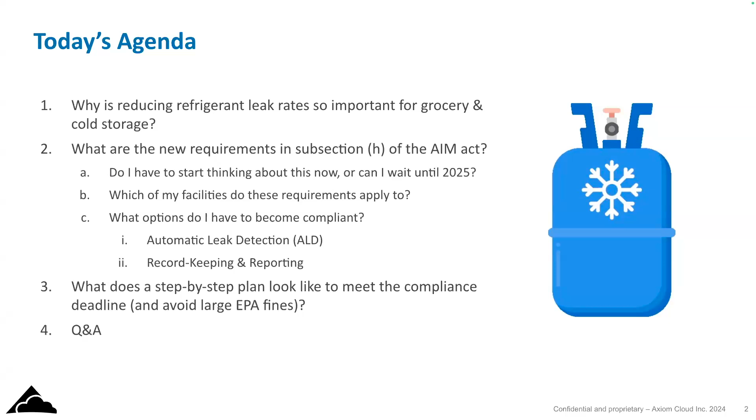Let's talk about the agenda. We're going to start by talking about why refrigerant leak rates are so important and reducing them, what the new requirements are in the AIM Act, and what a step-by-step plan looks like to meet the compliance deadline. We'll leave some time for Q&A at the end.

So why are HFC leak reductions so important for grocery and cold storage? There are 4 key reasons why refrigerant leaks are really detrimental to our business models in retail, grocery, and cold storage. There's the business continuity issue: when you have a refrigerant leak and it goes all the way to its logical conclusion, the system runs so low it can no longer meet temperature, and you have cooling outages. That's extremely disruptive for shoppers and employees, leading to lost sales, lost product, spoilage, and burnt out employees. Very painful.

There's the cost element, where a single leak can cost tens of thousands of dollars at this point, given just the price of gas, ignoring all the knock-on effects of labor, lost sales, et cetera.

There's a sustainability element, where in many cases refrigerant leaks are the number one driver of Scope 1 emissions, and one of the largest drivers of Scope 1 and 2 emissions combined. Each pound of gas that's lost is 2,000 to 5,000 times more potent than CO2. So you lose 1 to 3 pounds of this stuff, and that's equivalent to driving a car for a year. The average supermarket in the US, according to the EPA, is leaking around 800 pounds of this stuff per year. You multiply the potency by the leak rate, and that is a climate crisis all on its own.

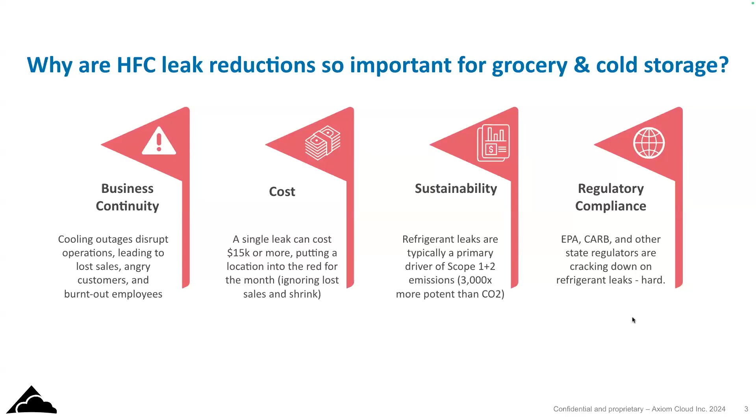All right, let's go to the next one here. Stephen, you want to talk about where we are today?

Sure. The grocery industry has been focusing on managing and reducing the leak rates of their refrigerant for a long time now, partially because it is very costly. Amrit was just describing some of the risks in terms of food spoilage and operational issues, not to mention the price of refrigerant has been going up massively by design, as part of the phase outs we're seeing under the Montreal Protocol, which has been around for decades, and the enacting legislation to better manage the production and consumption of these fluorinated gases.

We're really focusing on helping operators keep their commercial refrigeration beneath 20%, which is seen as the trigger rate for leak rates. When we look at the different ESG reports coming out of industry leaders, we can see that 50% or more of a store's Scope 1 and 2 emissions is due to refrigerant leaks.

Interestingly, retail giant Walmart put out their sustainability report, and Scope 1 emissions from fugitive emissions from refrigerant leakage were the majority of their Scope 1 emissions and made up over a quarter of their combined Scope 1 and 2 emissions. So if that's for Walmart, imagine what it is for someone who does...

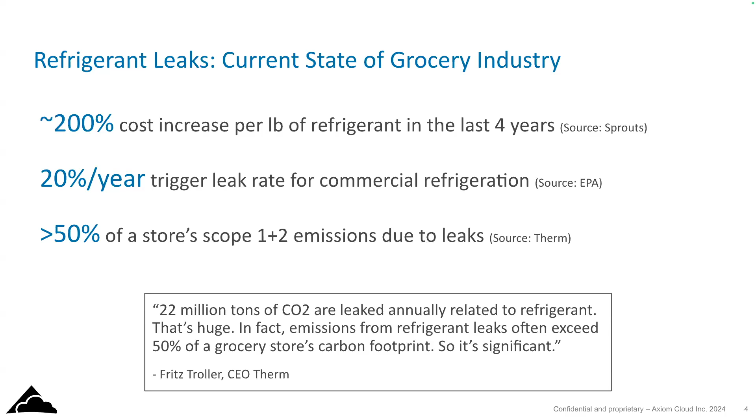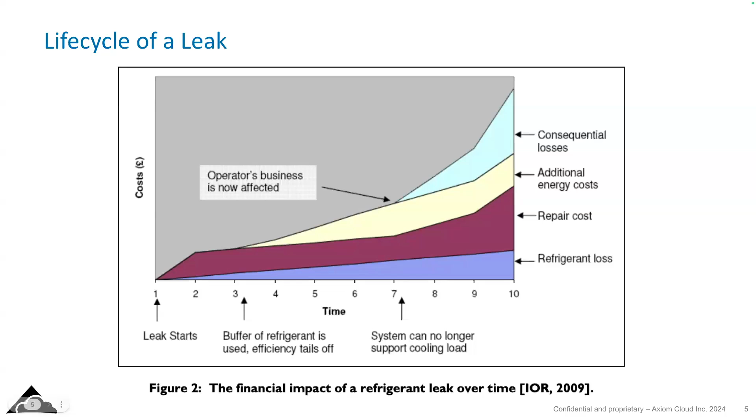So let's keep going. Stephen, you want to talk about the AIM Act? Sure. So the AIM Act is what we are all focusing on today. This was signed into law as bipartisan legislation by President Trump in December of 2020.

As we've discussed, the impact just in terms of tons of CO2 equivalent is massive here. It's a huge opportunity to make a meaningful and enduring impact on collective emissions and how we address the climate crisis. On this note, I'd say overall regulation of CFCs and HFCs has been part of a long, very promising track record of cooperation between multiple industry stakeholders and governing bodies at state, federal, and international levels. That, I think, can give us all a lot of hope that as an industry, we can come together, set achievable targets, and follow through with the technology and processes necessary to meet these objectives.

Now, in terms of the specific timing here, we've all read the draft framework of Section H, the management portion of the AIM Act. That was released about a year ago, in October of last year. So we are waiting with bated breath for the finalization, which we're expecting literally any day now. EPA has said by end of summer. I've heard that while the equinox is only a couple days away, perhaps the EPA defines end of summer by the end of September. So we'll see.

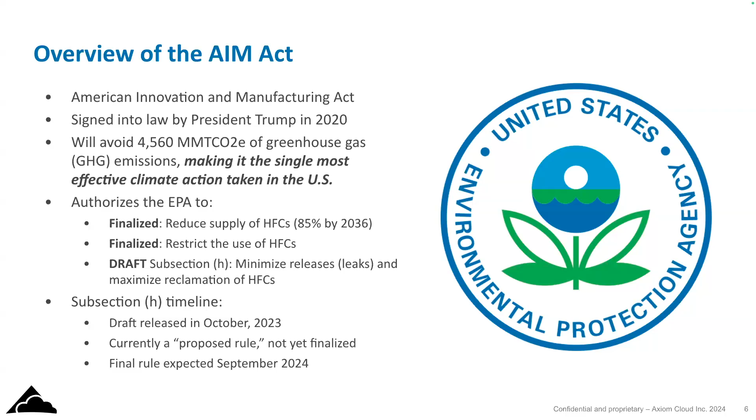Regardless, there are a number of things we can learn just from the proposed language that can help us better prepare. So I guess with that, why don't we turn to the next slide? Specifically, subsection H is the management plan.

And already we've seen the phase down rule, subsection E of the AIM Act, set the production and consumption controls. Essentially, the step down of the most harmful, from a GWP perspective, HFCs and refrigerants. Then the technology transitions rule applied specific restrictions to specific sectors and subsectors. And what subsection H does, which will be finalized any day now, is really focus on maximizing reclamation and minimizing release of the HFCs.

So as other portions of the AIM Act control the supply of these refrigerants, subsection H is really focused on how do we manage what's already in the field. How do we manage the existing fleet of assets, the existing refrigerant, so that we're making best use of everything that's out there and minimizing the potential for harmful releases.

One thing to note is that subsection H meaningfully broadens the scope of assets subject to these refrigerant management requirements. I'm sure everyone on this webinar is well aware of the decades of regulation already in place under Section 608 of the Clean Air Act, which have really focused on ozone-depleting substances and generally set the charge size at 50 pounds and above. Granted, there have been other restrictions on disposal for smaller assets, but for the most part, most refrigerant management at both the federal and state levels has focused on assets at 50-pound charge size and above.

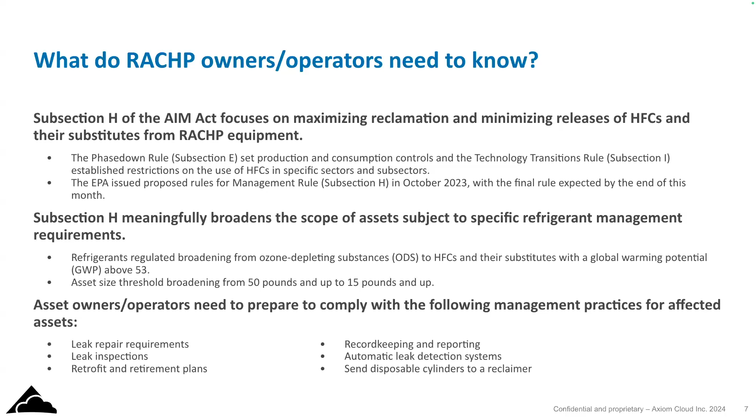So now we know more about actual subsection H and what it includes, and there are some really significant changes. And I didn't mean to send that note out during Stephen's slide—apologies for that, I pressed send a little too early there. But basically, the next question is, do I need to start thinking about this now, or can I wait?

So we put together a little calculator just to give folks a sense of what the timeline is here, and let me think about the scope of what needs to happen from the perspective of my organization. I dropped that link into the chat. But basically, if you're doing some simple back of the envelope math, you're looking at the total number of sites in your portfolio today, the percentage of those sites that require automatic leak detection and other things under the AIM Act, and then you think about how long it's going to take to contract with a new vendor, including things like legal, IT interconnection, procurement, et cetera.

There's not a lot of time here because ultimately this regulation is coming out supposedly this calendar month, September, and the EPA has signaled there's going to be a 12-month compliance period. So that means that by the end of next September 2025, this needs to be deployed across all eligible facilities. That's not a lot of time. So we want to give folks a sense that it's time to start thinking about this, planning for it, considering options now.

Stephen, do you want to talk a little bit about the percentage of sites where this is going to be applicable?

Yeah, so what we've seen—there are many different aspects to the AIM Act, but the specific leak repair, leak inspection, and reporting requirements kick in at certain leak rate thresholds. And what we've seen, generally speaking, is about 25% of assets in our massive data set of hundreds of thousands of assets report leak rates that exceed that threshold. We actually assume industry averages are probably higher, because customers already using a refrigerant management platform are using more sophisticated management practices than the vast majority of assets out in the field. So owners and operators of those systems need to be prepared to broaden those standard operating procedures to include all assets, inclusive of smaller assets, and other material types that may very well be subject to these requirements.

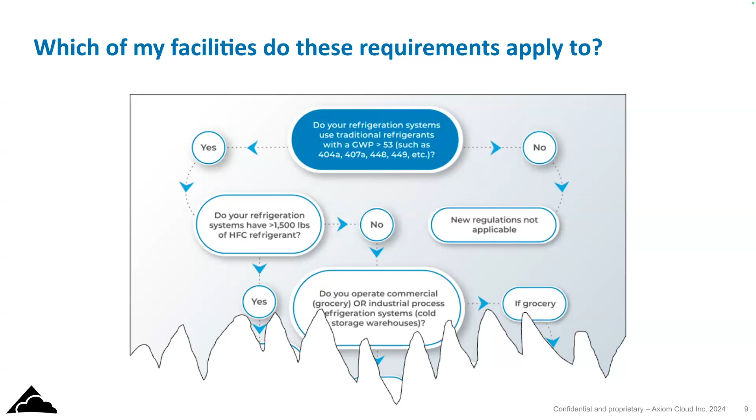Of course, Stephen and I would be happy to help with that too, if there are questions. Let's go to the next slide here.

So let's talk about leak detection methods that are commonly used. We're going to zero in on leak detection, specifically automatic leak detection, for a second. Then we're going to turn over to refrigerant management, tracking, and record keeping, and Stephen will talk more about that.

In terms of leak detection methods commonly used today, the most common method we see in industry is case temperature alarms. Put simply, there's no leak detection involved - grocery stores are waiting until there's a critical temperature emergency in the facility, and then they determine after the fact that there's been a leak, in many cases for a very long period of time. Now they're at a critical end state where the facility has run out of gas and is having issues providing cooling services. We're having case temperature issues. It's just not a great state of being.

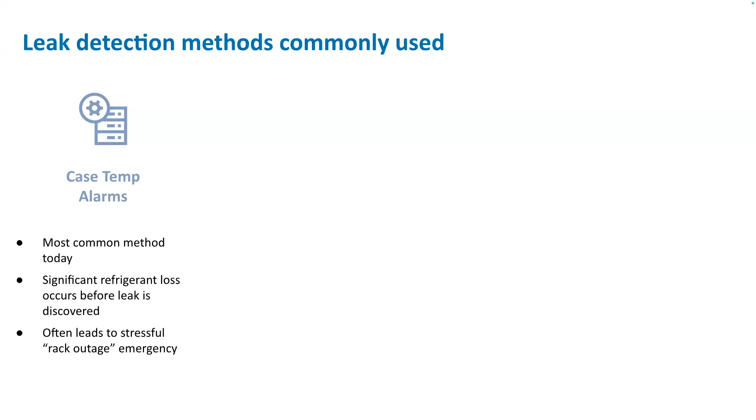Quarterly manual leak checks technically meet compliance requirements in some cases, but not others today in California. They will meet certain EPA level requirements under the AIM Act as well, but definitely not all of them. There are significant drawbacks from an ROI standpoint and from a leak rate standpoint - if you're only checking every 90 days, you might miss a leak for 89 days if it pops up right after one of these checks.

Beyond that, this means in many cases you're very much dependent on whether the technician showing up to do the manual leak check is really putting in their best effort, and whether they're being really careful to check every last potential leaking area. Or maybe they're tired, or they have 15 other service calls that are high priority emergencies taking more of their headspace and time and energy that day.

There's the single point gas detectors - essentially a little box you bolt onto the wall in the mechanical room typically. These provide a really important safety function because if you have so much refrigerant leaking into the air that it displaces oxygen, that can cause human occupants to pass out. That's really bad, so this helps comply with a lot of safety regulations.

Unfortunately, these single point gas detectors are not a good solution for overall reductions of leak rates because they're only catching really huge leaks, and only in enclosed spaces like the mechanical room. So you're going to miss the majority of leaks using that strategy. However, this has been found to be essentially a loophole in a lot of existing regulations at the state level - if you have one of these single point gas detectors in California, for example, you're technically compliant with a lot of these regulations.

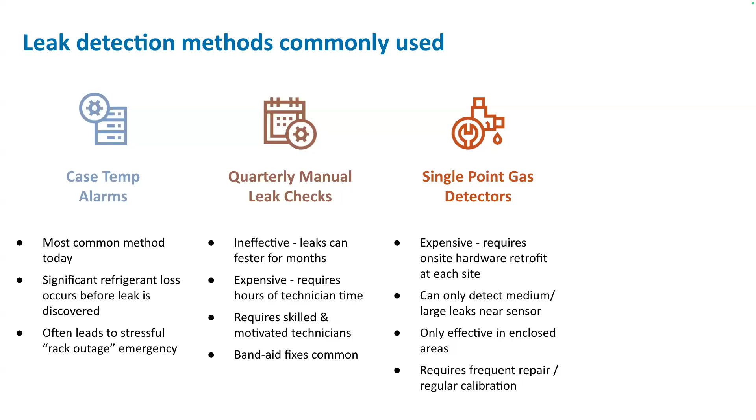And finally, there's receiver level sensor threshold alarms. These can be really effective. The problem is that if you don't already have them pre-built in from the factory, retrofitting is an absolute nightmare, and that immediately disqualifies over half of facilities out there in the field today, based on our experience. Even if you do have these sensors in place, the data coming off of them is incredibly noisy and difficult to interpret.

So when you have a condenser split turning on or off, when you have a domestic hot water heat reclaim turning on or off, when you have different case groups coming in and out of hot gas defrost, it causes huge swings in refrigerant levels within the receiver.

And so this data becomes really noisy. You can set up all kinds of rules and alarms, and you end up getting so many false positives that a lot of times they're ignored because it's too much to manage for a team that has other priorities. So this is another example of a solution that's been tried a lot, but really hasn't delivered the type of benefits that the EPA is seeking, and that we as an industry should be seeking as well.

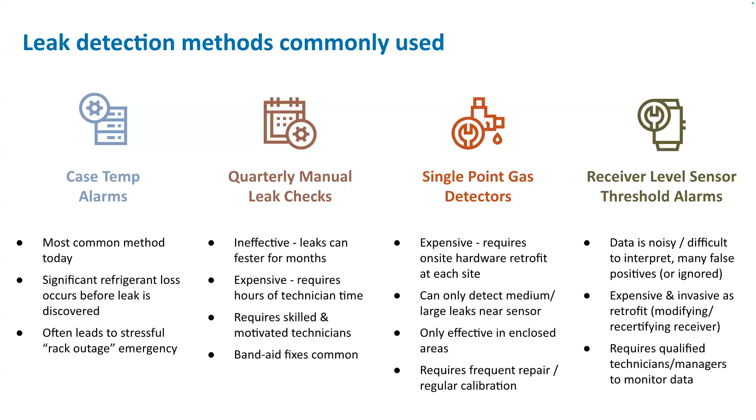So what are the compliant methods available today? They fall into two buckets according to the EPA. The first is called direct ALD systems, direct automatic leak detection. The EPA defines that as using sensors or hardware to monitor the concentration of refrigerants in the air.

So this is essentially a sniffer system. It's sniffing the air, determining how many parts per million of refrigerant are in the air today. The EPA listed 8 direct ALD manufacturers in the AIM Act, Subsection H, released back in October 2023.

The EPA is very clear that having a single point solution in the machine room doesn't cut it. You need a lot more sensors than that throughout the facility. So in many cases, folks are going to be resorting to multi-channel leak detectors, where you have 16 to 32 to 64 channels of little capillary tubes that are retrofitted, installed, and routed throughout the facility, then feed back into a couple of centralized sensors, sniffing each channel individually on a cyclical basis.

So there's a lot of advantages to these type of systems. This is the fastest type of leak detection. You can detect a leak in minutes after it begins. You can pinpoint the leak location to wherever that sensor is, and it does provide that safety compliance as well, providing an immediate alarm in case there is a real human safety issue.

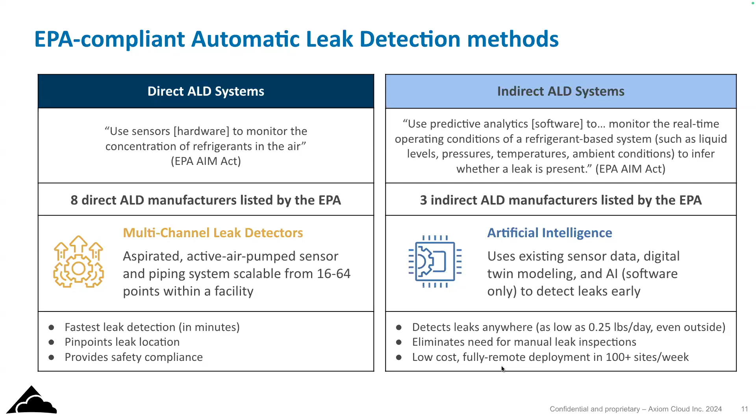So a lot of advantages to both. And obviously, there are a lot of decisions to be made there by each individual grocery chain. So I'm going to hand it over to Stephen now to talk more about compliant refrigerant management plans. Essentially there are 3 broad categories that everyone needs to be thinking about in now a broader sense.

First is understanding your exposure, then it's updating your standard operating procedures, and then finally it's ensuring that you're doing all of this in an audit-ready way.

In terms of your exposure, determine which assets are included in the Subsection H requirements. Unfortunately, we don't have the final rules yet. Any day now, we should know what the charge size will be. Are they going to go with 15 pounds as proposed? Are they going to increase that maybe to 25 pounds? Are they going to decrease that maybe to 5 pounds?

Not certain yet, but you probably want to have a good sense of what your current asset profile looks like so that you're prepared. Additionally, material types—they have now broadened the material types that fall under these requirements from just ozone depleting substances class 1 and class 2, to now incorporating HFCs with GWP of 53 or more. So making sure you understand the charge sizes and material types in your fleets helps you better prepare to accurately track and address these regulations when they go into effect.

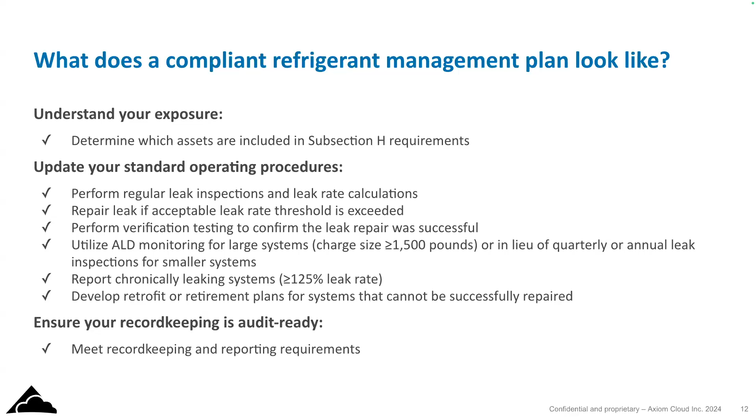So, Stephen, you want to start us off on this one? At the risk of being repetitive here, the main thing you should do now is understand your exposure. Make sure you have a good sense of your asset inventory, specifically a focus on material type and charge size—that's the first step. Many of you already have this. Great—now you can make informed decisions around how much your practices will have to expand to meet the broadening surface area of these regulations as enacted by Subsection H.

But if you're not sure, if you've just been tracking your larger systems, then you're definitely going to want to make sure that in your upcoming service visits or general procedures with your facility managers at the local level, you're enacting some sort of plan to have a better understanding of your asset inventory so you're ready to update as necessary.

Yeah, on the second piece here, this is a critical one. I can say with great conviction now that doing nothing is no longer an option. So have that conversation with your leadership, with your CFO, with whoever you need to have that conversation with, because you're going to have to do something in 2025.

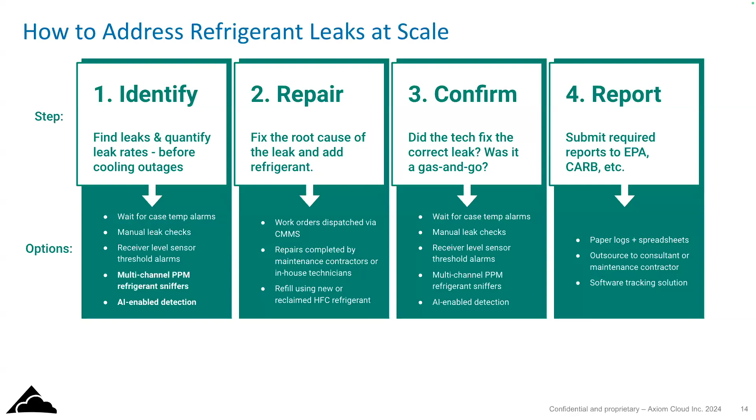And finally, reporting. This is getting back to record keeping, being audit ready, and ultimately proactively reporting when required to EPA, to CARB, and to other state and federal agencies as required.

So looking at the AIM Act, there's a bunch of new requirements across various parts of this overall process. Now on the identification piece, automatic leak detection is required. On the repair side, as we chatted about briefly, prompt leak repairs are now required, and use of these reclaimed HFC refrigerants is now required according to the draft language. A lot of this stuff was required in the past, but the AIM Act is substantially tightening up these requirements. Finally, on the reporting, record keeping, and logging side, requirements have increased substantially, especially for these chronically leaking appliances.

So to summarize, the AIM Act is not changing this 4-step process. It's simply making these various steps more rigorous and providing a little bit more federal oversight. Key takeaway here is that there's not a single vendor which can help with all 4 of these. It's going to be a tapestry, a team, essentially, to help you accomplish your goals as a retailer, to remain compliant, and also to achieve these other ROI, speed, and ease related goals that you may or may not have.

So we've done fantastically well on time here. And I guess, Stephen, last question: which steps in this process does Trakref support today? Yeah, well, I'd say Trakref helps you remain audit ready for every piece of this 4-step process.

So from an identification standpoint, you want to make sure that whether you're using regular leak inspections or ALDs, that you have a record of both the method that you're using, the fact that it's up to date and calibrated, and that those service events, whether it's an alarm that is triggered or an inspection that takes place, is reported in a way that is audit ready.

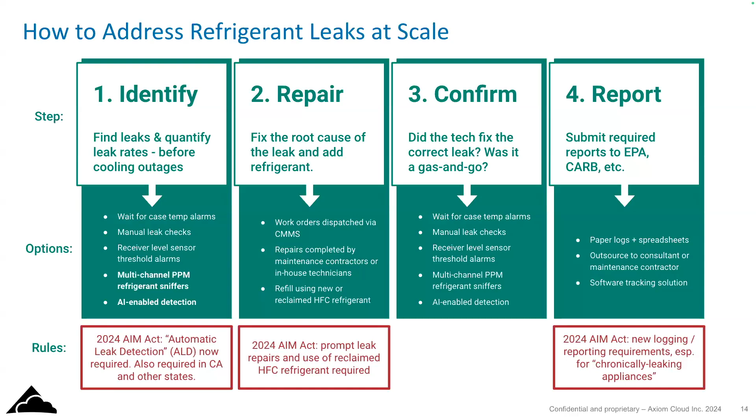So, yeah, from there, let's go into Q&A. We're getting some great questions coming in here.

So let's see. The first is, what is the EPA doing to enforce the AIM Act? Stephen, you want to take this one, or should I?

What I have primarily heard is that there's more of a focus on enforcement in the years ahead, which essentially means more audits. Another piece I saw written in the proposed language is looking at some standardization of the reporting that would be required. Standardization is going to make it easier to verify and then conduct audits if necessary. So I do think that being prepared is the best step you can take in light of what people are expecting to be increased enforcement here.

One thing I'll add is that the EPA puts out a set of published enforcement priorities pretty routinely. Within the last year or so, they released their 2024 through 2027 enforcement priorities, and HFC emission reduction was their number 2 priority on that list of 3 items. So if you think about the entire scope of everything the EPA does, this is a top 3 item for them now in terms of enforcing this regulation, for the entire agency, the entire country. This is a very high priority for them.